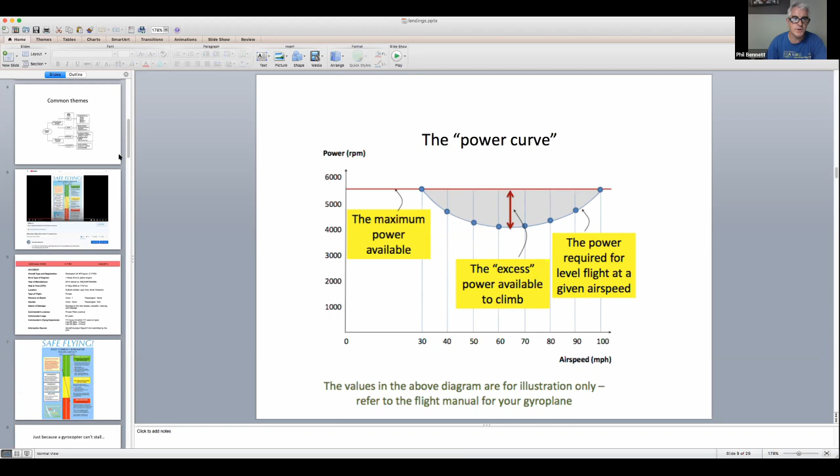And I don't see how you can be behind that curve very easily. The problem with the word power curve is a lot of people come to aviation knowing more about automotive things, and they think of a power curve as engine RPM and power. And typically when we're flying, we set an engine RPM, so the power doesn't change. So being behind that power doesn't make a lot of sense.

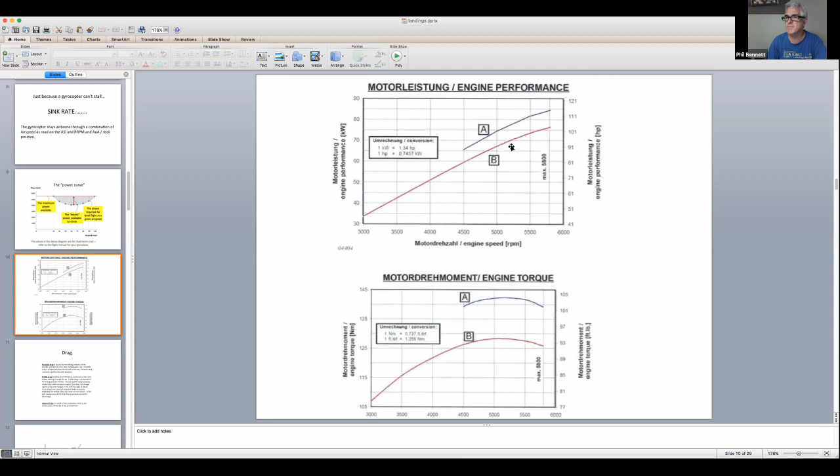What I think they mean, and what they actually do mean, is being behind the drag curve. In a gyroplane, there's 3 drags. I'm not going to go into all that in great detail, you can review this webinar later in your own time. But basically, you've got parasitic drag, profile drag, and induced drag. Parasitic drag is basically the body of the aircraft being stuffed through the air, creating drag. Profile drag is the drag from the rotor as it spins, and induced drag is the drag that comes through the production of lift. If you were to visualize that in a smoke chamber, it's those tip vortices that come off the end of the rotor, or the end of the wing if it's a fixed wing.

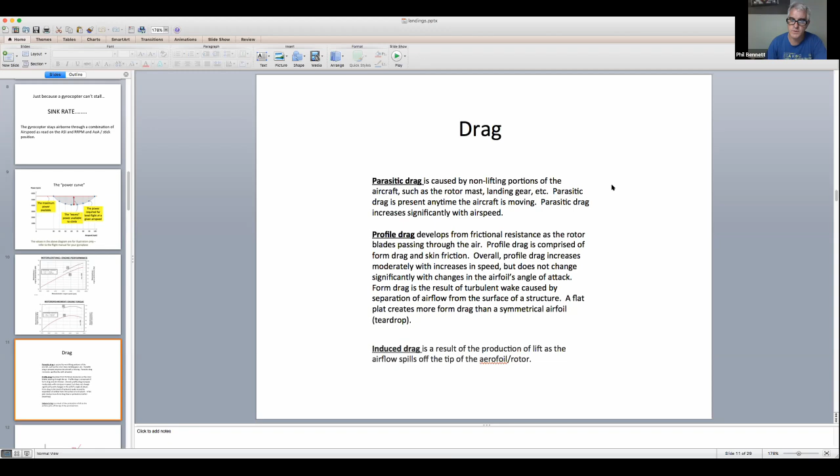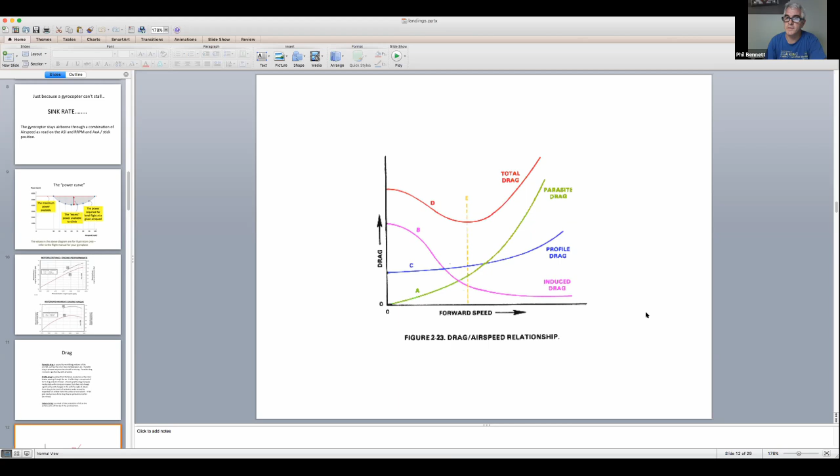If you graph all of that, you get parasitic drag and profile drag that increase with speed, and induced drag that decreases with airspeed. That's because induced drag, as you get faster, because of the way the lift equation works with velocity squared, if you keep lift constant, you can take away angle of attack, and therefore the drag reduces. If you add all those drags together, you get total drag, which is the red curve, and then we get this, which really explains the behind the power curve, behind the drag curve.

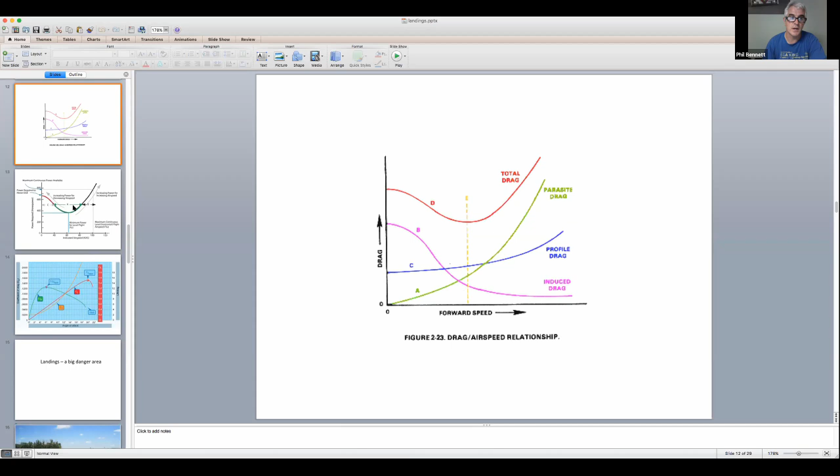That's relevant to us with landings, because what tends to happen is once we're in the final part of the landing phase - as you start to flare to land, you're adding more and more angle of attack to try and maintain the aircraft in the air, and in the end it just runs out of energy and it lands.

The reason I mention that is because when we look at what goes wrong with landings, depending on how you decide to present the aircraft to the runway, depends on when that critical phase happens. One of the problems with landings is that a lot of people get very slow, and if they're unpracticed, they get slow, but also high and slow, and then they just fall out of the air from the last 4 or 5 feet.

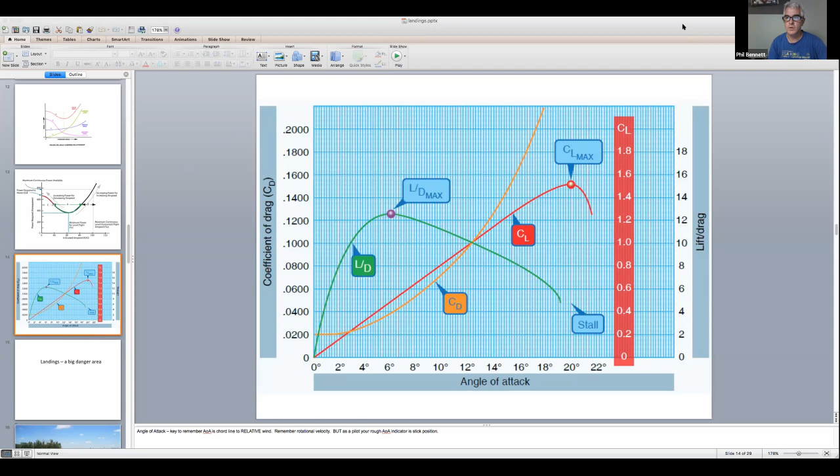The problem is, if you allow the nose to drop as you turn, but you keep pulling more and more backstick thinking you're going to level the aircraft, you don't - all that happens is you tighten the spiral. If you start with a wide spiral with not much backstick, but the nose drops, you won't pull out. You don't pull out of the descent by pulling backstick, all you do is tighten the spiral, and eventually you hit the ground.

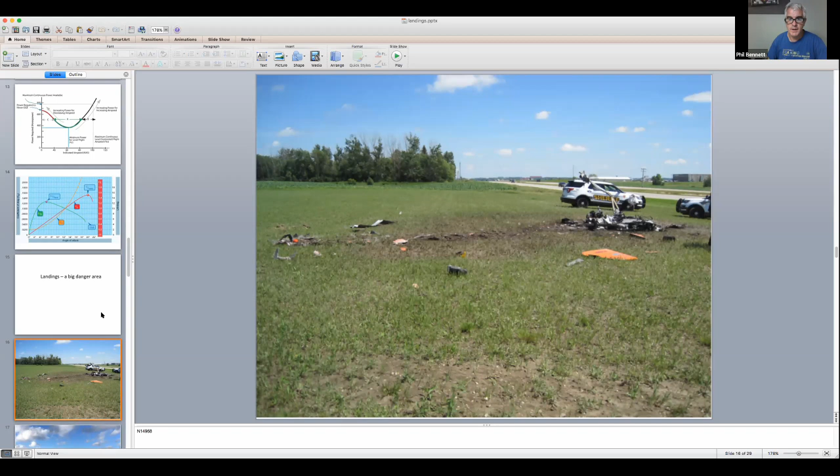Anyway, so sadly that was one landing accident. Here's one from Sweden, an MT-03. Would you believe he rounded out? So that means from the descent, you're descending on final approach, and then you've got the round out, a float, and then a flare. So that round out, he ended up being 7 meters high still above his target landing area, and then fell out of the sky from 7 meters.

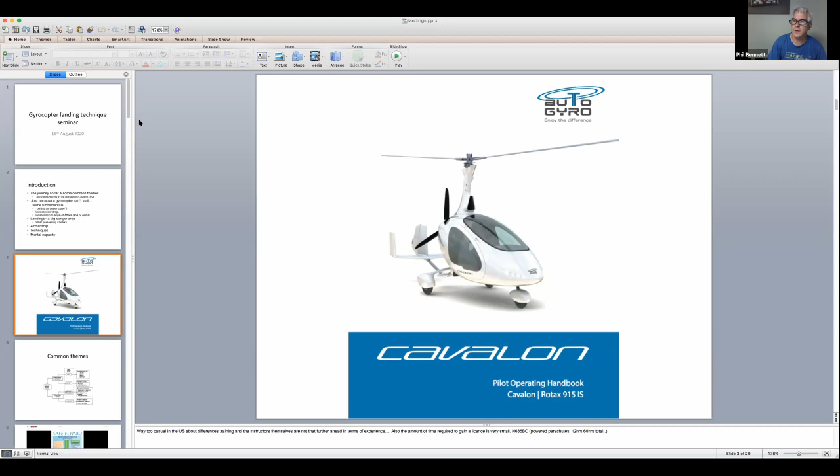And all the trim system does in AutoGyro products is it's a pneumatic system that just takes away some of the stick force, as most trimmers do, frankly. So normally if you're flying around in a Cavalon, most people will cruise somewhere between 80 and 90 miles per hour, but they'll probably slow down to 60 to 70 in the landing phase. So they just need to retrim, really.

So that's the situation. Another problem that we have with landings is - let me go chat. Yeah, cool.

Another problem we have is people are very reluctant to go around, or they don't even think about going around. That's the problem. It's not part of their mental process. It's not part of their flight planning to incorporate a go around as an option for them.

The other thing is bashing the circuit. That certainly tripped up that guy here in the Magni, and we'll talk about that in a minute. Crosswinds are another issue, which is also related to yaw and drift issues. And then I'm going to talk about these last three separately, which are questions about linked nose wheels, the aircraft that are side by side rather than tandem, and the managing of our rotors after we're on the deck.

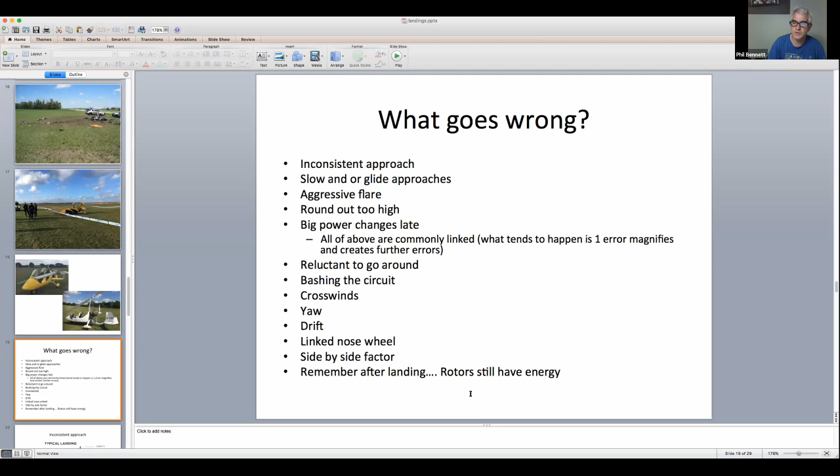A lot of people, typically in single seaters, still use this as a bit of a template for their landing. It's probably not quite as aggressive, but a lot of people like to use glide approaches all the time. So they'll arrive with engine on idle, and at some point they'll get to 60 miles an hour and then try and make a landing.

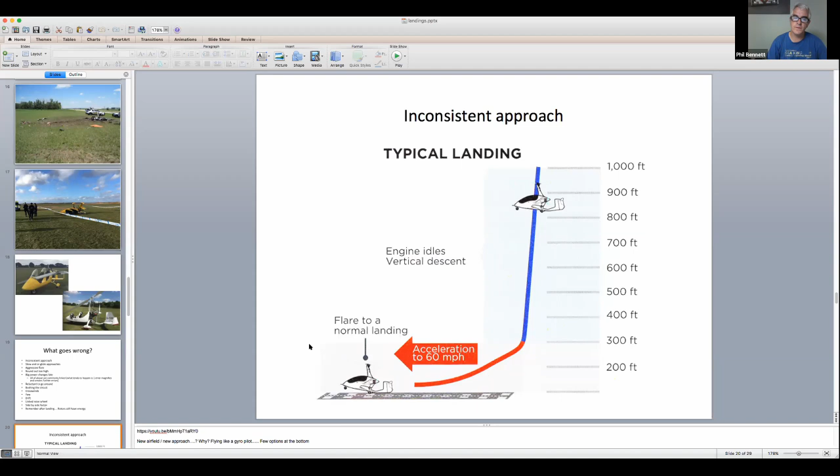I'm just going to show you a little clip on YouTube, which will probably... let me get it up and we'll see what happens.

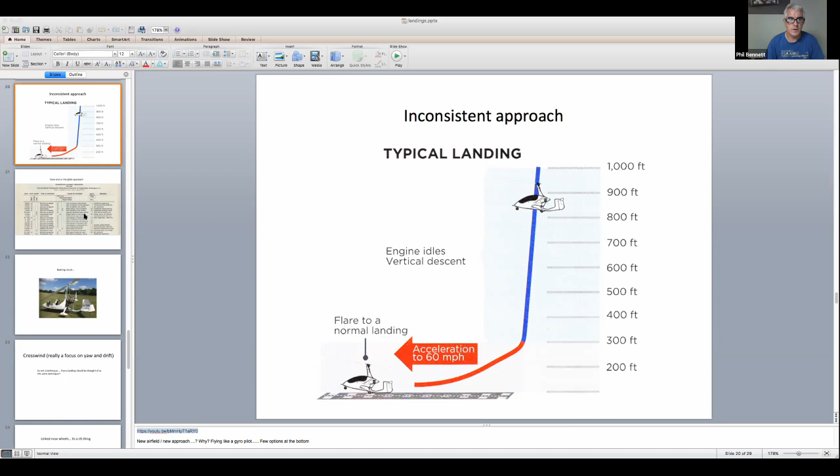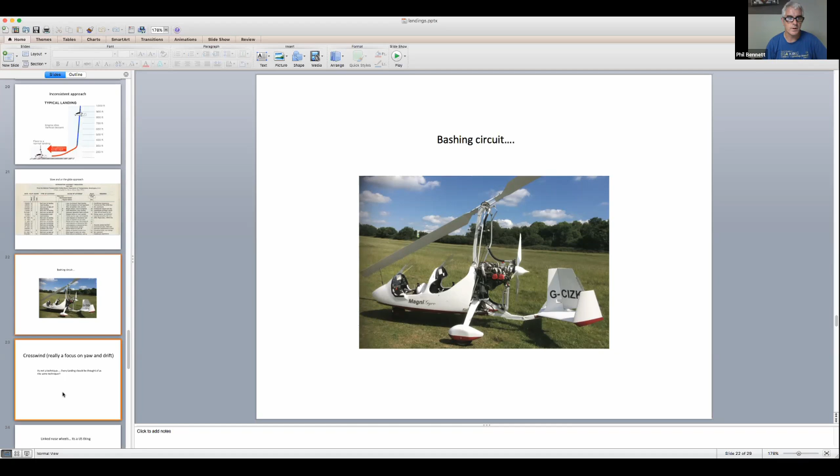Crosswind. Well, happily, I've made quite a good video on crosswind landings, and you should all probably take a look at it in your own leisure. But I just want to show you, I'll bring it up and talk over the film that I'd already made, and we can see what happens.

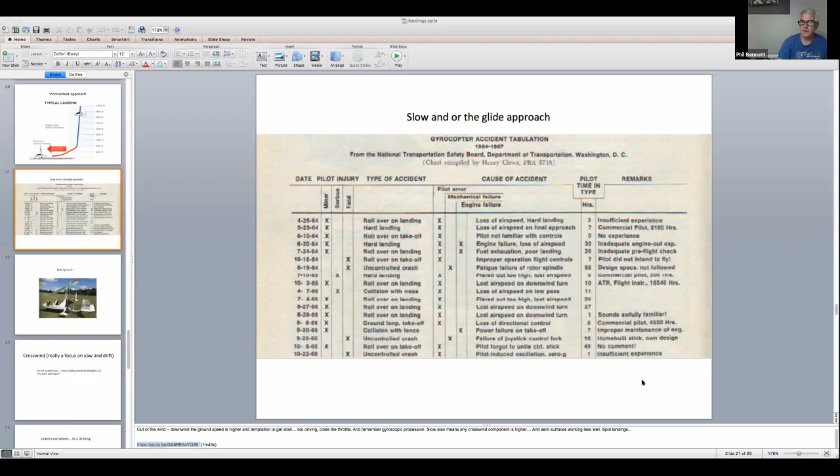So I do think that there is a tendency to overthink the linked nose wheel issue, because basically, if you fly correctly and you are making good landings, it's not an issue.

The next myth is this side-by-side factor. So basically, there is a school of thought which says that it's more difficult to fly a Cavalon or a side-by-side aircraft like an M24 than it is to fly a tandem, because when you're approaching the runway, if I just get my orientation right, you are not on the center line. Your seating position is offset from the center line of the runway, creating some kind of parallax effect, and that's why people don't fly them so accurately.

I don't buy a lot into that explanation. I think it's an excuse for other issues that are probably more to do with where people are looking and how people are flying final approaches. And it also creates extra revenue for the instructors that make a big deal out of it, because they're trying to get more hours out of you for something that, sitting side by side, isn't a problem for people that fly fixed wing.

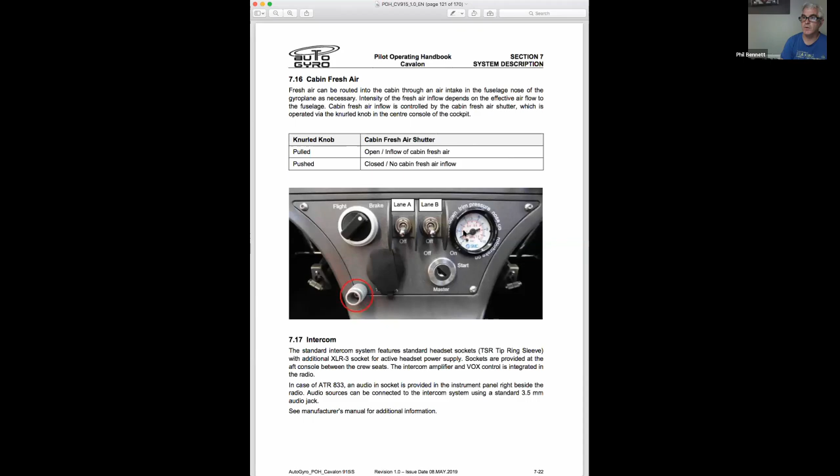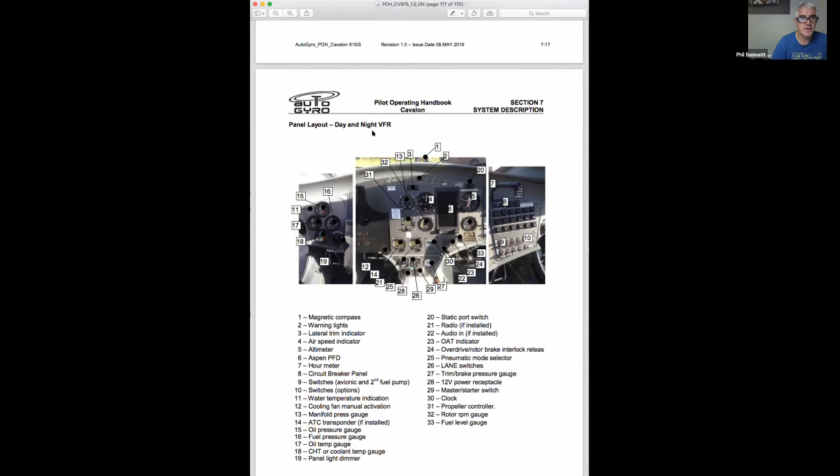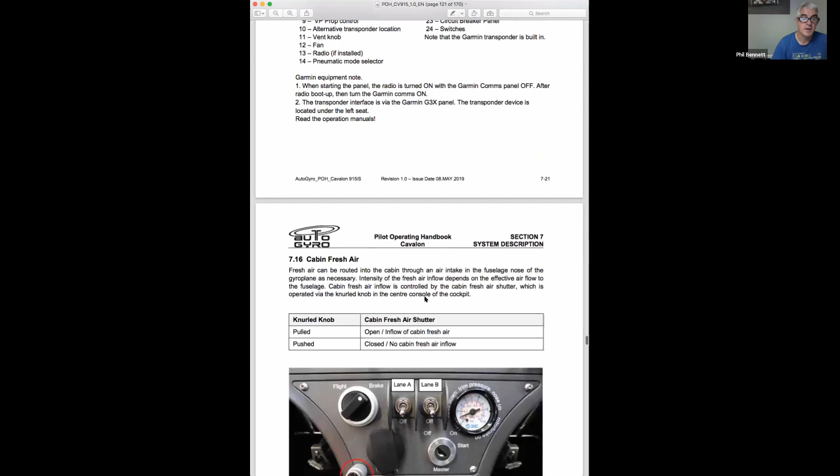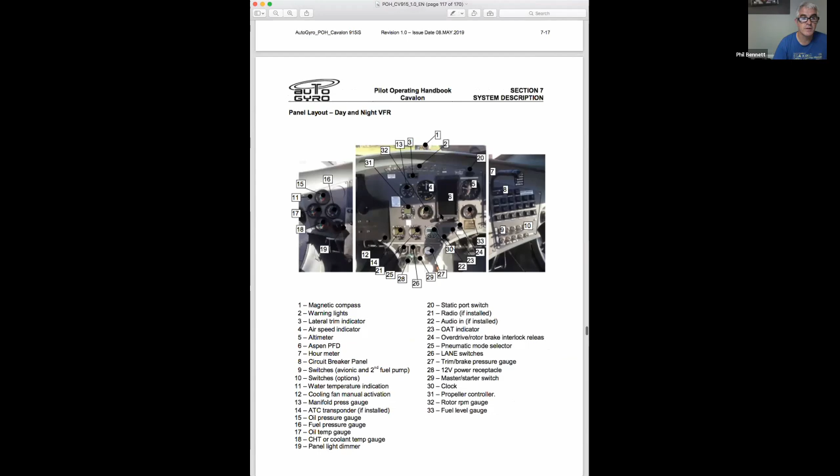Now you might take my point that you could quite easily see a scenario where maybe you've done some instruction in a Cavalon, but it's not the Cavalon that you end up flying or buying, and it's got a different layout. Unless you spend the time going through your own layout, when it comes to the point when you desperately need to know, you don't have time to learn, and you then make a mistake, or your mental capacity is so absorbed with that thing that every other element of your flying turns to shit, for want of a better word. And it's true, it happens.

The other thing that tends to kill mental capacity is radio.

Now, I'm going to show you, let me try and find... that's a... it's actually not a takeoff, but it's not a landing, it's a takeoff. And what I want to do is let me just show you, that's me. Let me find, is it G-CGOT? Right, here we go. So let me share my screen. Where am I?

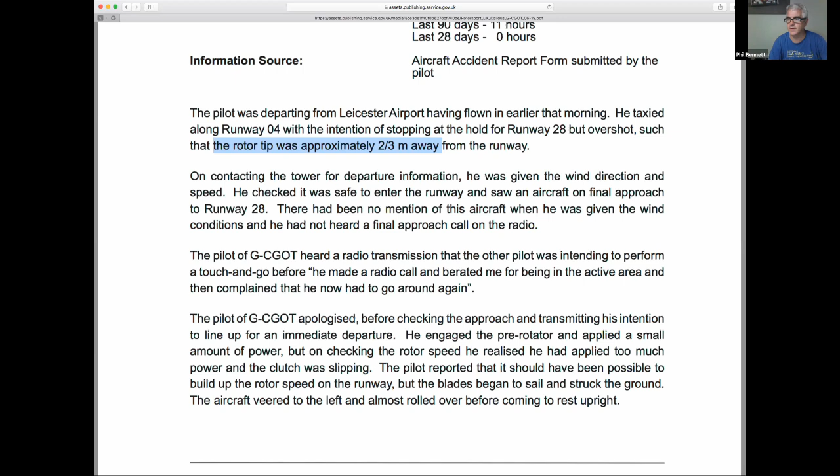He's obviously stressed that he's got his rotors over the threshold. And now he thinks the other pilot was going to do a touch and go. The other pilot was giving this gyroplane pilot a bit of a beating on the radios, berating him for being in the active and saying he has to go around again. So he basically decided he was going to try and line up and expedite his takeoff.

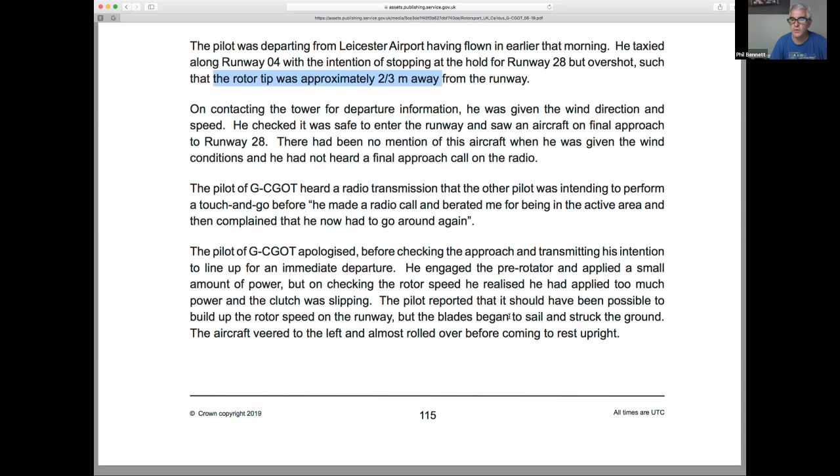But in the process, he basically screws up the takeoff and crashes. So the point is that mentally, he's got distracted with so many things and felt pressured to do things. And then he's compounded his stress by making further mistakes. So again, I'm just reiterating the point that not all of the techniques are the totality that makes you crash or not crash, or a good pilot or a better pilot. There are other elements in there that make the, you know, complete the picture.

And that's why when I talked at the beginning of all of this, I said I don't think that 10, 20 hours is enough. It's not necessarily just because 10 or 20 hours solely focused on a takeoff or a landing technique isn't enough. It's just that I don't think all of the parts put together, you've just got enough time to get everything done that makes a difference, and that's the key.

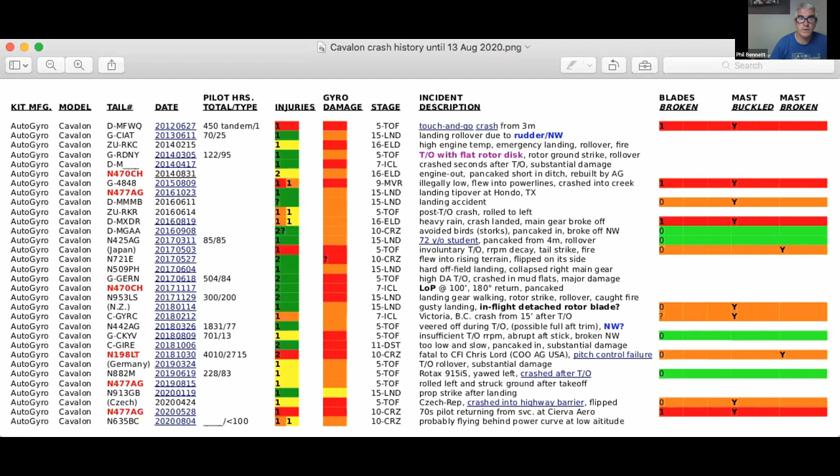There you go, can I make that bigger? There's all the Cavalon accidents worldwide, I believe.

So in the US, the first one was this, 470 Charlie Hotel. That was with an instructor, an instructor-student flight, and they said they had an engine out after takeoff. I'm pretty sure that was either the floats in the carburetor absorbing some stuff out of the fuel, or it was bad fuel and it was a hot day. It just kind of got airborne, but only just, and then pancaked into a field.

The next one was 477 Alpha Golf, landing and a tip over. Then we've got another pancake from 4 meters, so that's a landing accident.

But in fairness, a 72-year-old student - and I've got to say, unfortunately gyroplanes do tend to attract older people. I'm 49, so it's not as if I'm a spring chicken, but the reality is that the older you get, you just get slower, and trying to learn new things when you're very old is obviously a bit harder.

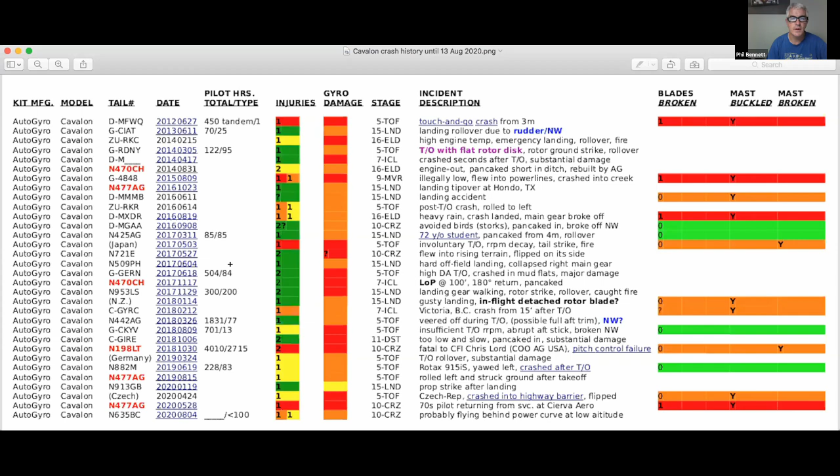I can see the board's lit up. So it's a pretty mixed bag really, the answer about takeoffs and landings. They're mainly takeoffs or landings actually.

What are the ones I got? 470 Charlie crashed twice, and very sadly 477 Alpha Golf crashed 3 times, and I think the third time it was fatal.

They're yet to find out what that was, but again that was quite an old guy flying that, and I'm not convinced about the fuel actually. I say that because if you read the preliminary report, the family really overplay the fact that they say it's non-ethanol fuel, and I just don't think that's a natural conversation to have with your mom and dad, or your family.

Let's be honest, I go flying all the time, and I don't make a point of saying to my wife, I'm just going to the fuel station, sweetheart, to get non-ethanol fuel - it wouldn't mean anything to her anyway. So I'm a little suspicious about that, but we'll see what materializes.

Right, gentlemen, if you've got any more, thanks Keith. Yes, I can. Sorry, Cameron - mechanical turbulence near to, yes.